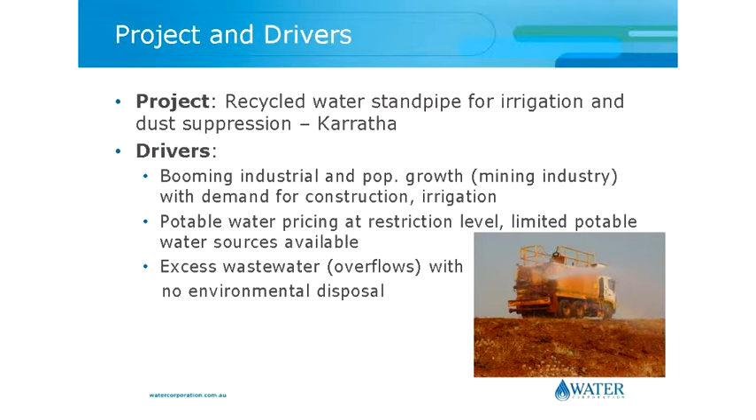I've chosen a slightly different scheme again from the other presenters. We've got lots of schemes as well. Most of ours are permanent schemes. I've chosen a transient scheme. I'm not sure if that's going to come up in the questions, but thought it might be quite interesting for the audience. The project is to develop a recycled water standpipe for irrigation and dust suppression in Karratha.

Now, for people who don't know where Karratha is, it's in the booming northwest of WA. Karratha is a city which actually probably sits at about 20 to 25,000 people maximum. Its population is estimated to grow to 50,000, so it's going to double. And basically, there's not enough potable water to cover people at the moment, so there are restrictions already.

And there's too much wastewater and not enough hydraulics to get that wastewater out to recycling. And so all of the potable water is at restricted level, and basically there's limited sources available. So even if you get a customer to come up and say, we want to use potable water for dust suppression, you may only get it for a year, maybe not much more than that. Which, as you can imagine, is a significant problem for us because we're meant to support development, and there's a lot of housing subdivisions going in this area to support the mining boom.

And so because we don't have the hydraulics to move the water through our existing recycling scheme, we have lots of overflows to the environment out of our plants. These overflows basically flow immediately around the plant. These are areas which aren't accessed by people, so it's basically the bush, but our regulator still doesn't really like it that much. And also it's important to note that Karratha is in the northwest of WA, as it gets a lot of cyclonic rain as well, so we get overflows just from rainfall too.

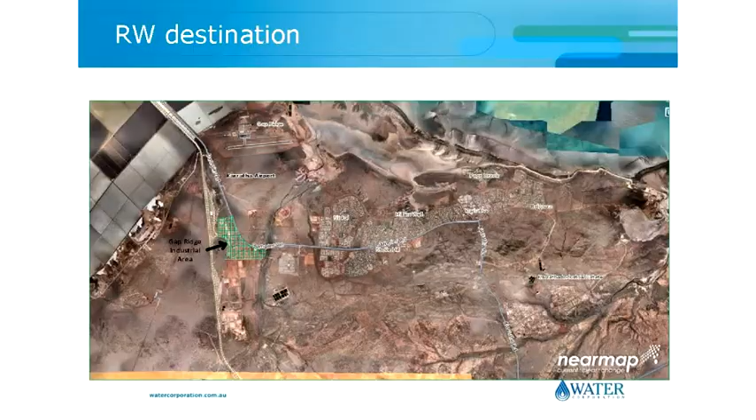So this is Karratha. I apologise for the scale of the picture. Basically, we've got two treatment plants. I should always say, can you spot them? There's one over there where you can see basically about 9 ponds, and there's one over here as well where you can see several clusters of ponds too. That one's K2 and this one's K1. We're very clever at our naming. And the plant I'm talking about is K2, which is the plant over there. And the green hashed area is the Gap Ridge Industrial Estate. So we're talking about housing estates and we're talking about industrial estates as well for Karratha.

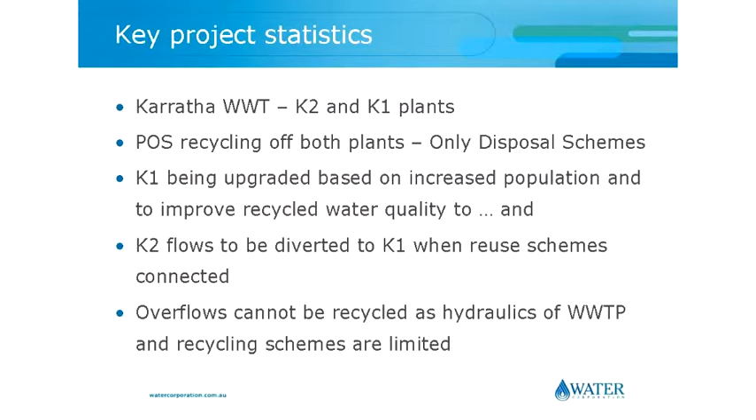Okay, so as I mentioned, we've got 2 treatment plants in Karratha, and at the moment they've got a scheme running off each of them. It's for public open space, and basically it's the only disposal. So we have no environmental disposal approved for Karratha. So every night of the year, the wastewater is pumped out onto ovals and parks throughout the town, even when it's raining. So you can imagine sometimes in cyclonic weather, we've got some very, very wet ovals.

K1 is currently in the process of being upgraded. It's being upgraded to increase its capacity to cope with more wastewater flows, but it's also being upgraded to increase its treatment processes to allow more uses of recycled water in the future, particularly a much higher quality water. The intention was to look at third pipe and other opportunities for housing subdivisions in the future.

Unfortunately, whilst it's getting upgraded, the city's still booming, so people still want to use the effluent right now. And the water coming out of K1 and K2 is pretty average. They're pond plants, completely overloaded. Basically, we're lucky to get 1,000 E. coli coming out of them that we're irrigating onto ovals, which I need to say is outside of the requirements of our DOH approval guidelines.

So when we upgrade K1, we're going to divert all the flows from K2 via a pipeline to K1. The only problem is there's a reuse scheme connected to K2 at the moment, so we have to connect the reuse schemes to be able to connect the treatment plants.

Overflows can't be recycled because of the hydraulics. We also have at our schemes contingency irrigation, so because we've got so much wastewater, we just set up sprinklers at the back of the plant and irrigate to evaporate basically. I know it's probably not normal to hear these kinds of stories, but this is what happens in the northwest of WA - it's purely disposal.

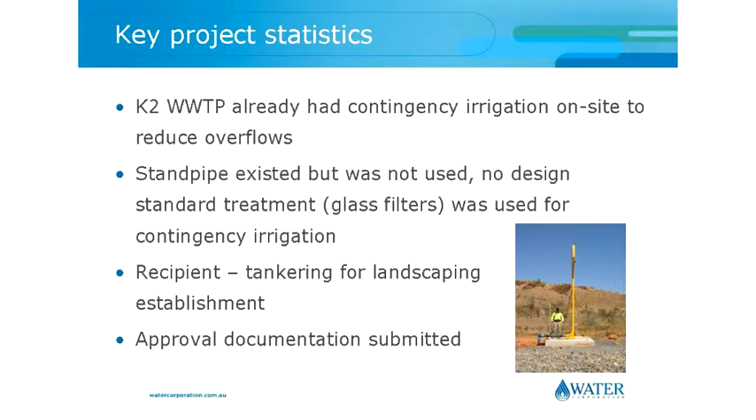And it's such a shame because there's so many users who'd like to use that water. So we said, how about we use the existing standpipe at K2, get it to a quality the department feels happy with, and use that for dust suppression. Landcorp and a lot of other major organisations were very interested to hear that, particularly because they wanted to stop paying restricted prices for dust suppression.

So the standpipe was in place, but it was never used. Basically, there was no internal design for how you treat recycled water for dust suppression, so we had to try a couple of different things, and someone came up with a clever idea for glass filters.

It's probably important to note, looking at that picture, there's not much out there. We've got one operator who runs about 5 of our treatment plants across the Pilbara, so we're not talking about high-tech equipment, high-tech people, or even high-tech assets.

So we decided to use the treatment plant for the contingency irrigation - the glass filters and the disinfection unit - and run that through the standpipe.

One of the recipients came and said, yep, we'll take recycled water. Basically they wanted to use it at the Gap Ridge industrial estate for irrigation purposes, setting up landscaping that, once established, would be self-sufficient - cyclonic weather would water it. So we had to submit an approval document to DOH for that.

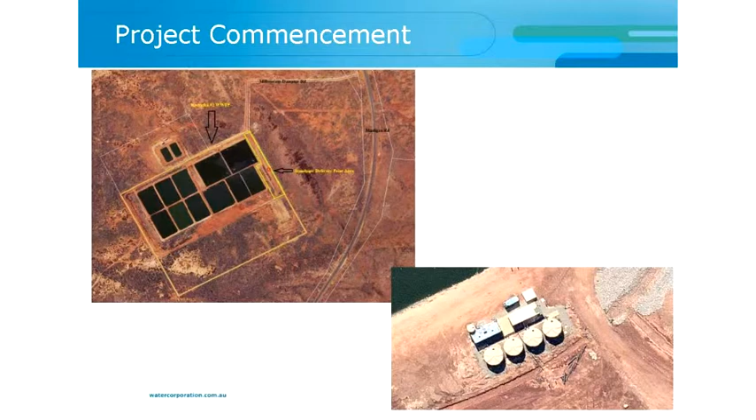And there were some treatment upgrades happening as part of the contingency irrigation, and we had to provide advice on what disinfection was required as well.

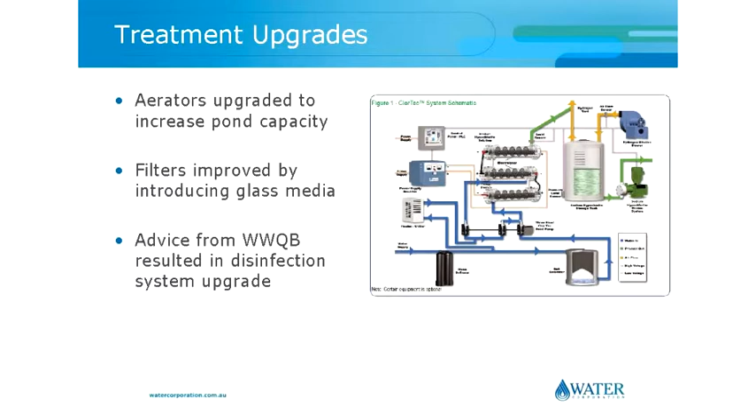So that's what it looks like. We set it up with a nice little touchpad - unfortunately, for the standpipe, people go and use it unless you secure it, so we had to set that up. And set up validation monitoring.

Now all of this is really important because, as I mentioned, our current effluent doesn't achieve the requirements for irrigation purposes of POS less than 1,000 every time it's meant to be sampled. For dust suppression, in the DoH guidelines of WA, it's meant to be less than 10.

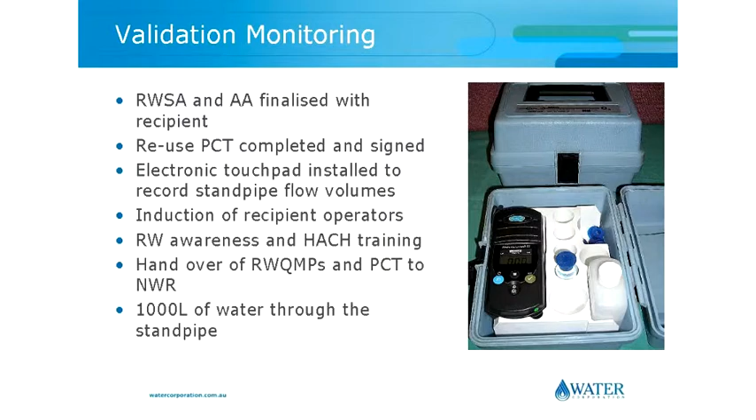So number one, we had to be confident that we were going to be giving a consistent and continuous flow of water that the DOH would be happy with. So we set up a lot of kit, which we thought would make the DOH more confident in how we ran the scheme to begin with.

We trained the recipients, taught them how to use the instruments, and wrote all of the approval documentation for the Department of Health. We also wrote a process control table - this is an operational plan. It basically tells you what to do and how to run the scheme, and if something goes wrong, what to do.

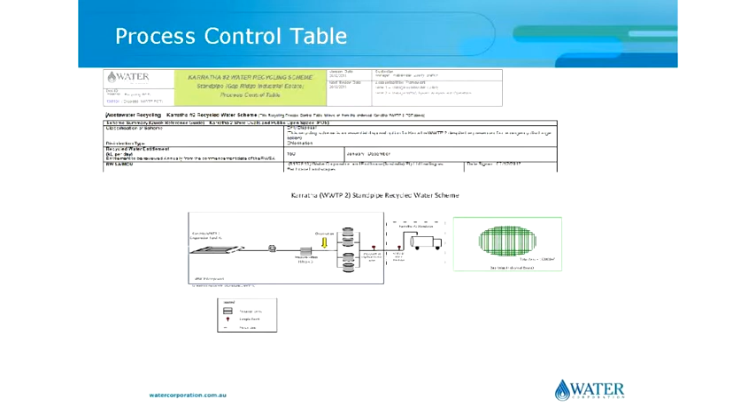So the project challenges, as I mentioned, we don't get great water out of these current treatment plants, so we had to basically work with the Department of Health to convince them that irrigating from a tanker for plants in an industrial estate out in the middle of nowhere is basically the same as POS, which could only achieve the less than 1,000 E. coli. That took some work, but the Department of Health agreed with us on that.

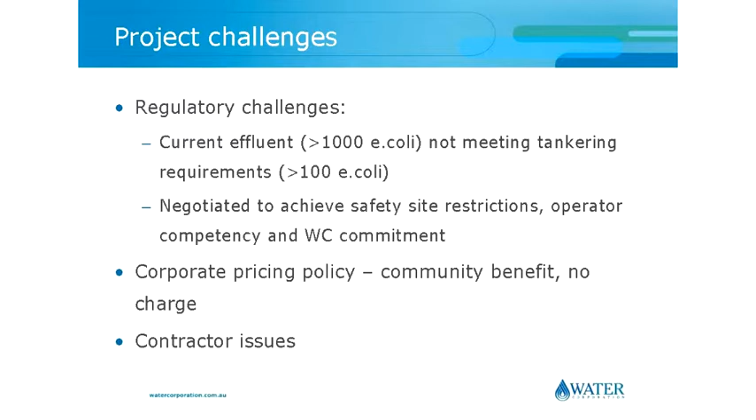They weren't so keen to focus on dust suppression at that because they still believe people are going to be on site, but we'll take that as our next challenge afterwards.

Our corporate pricing people, and I don't know if pricing's spoken about at these kind of workshops, but it is quite critical, because they believe that because the recycled water was being used for irrigation purposes, it was community benefit, and so the tankering customer received no supply charge whatsoever for that recycled water. Which is a great thing to get customers in, but from our region's perspective, it's no income stream. So they weren't that keen on it.

And you have to think about these things when you're putting schemes onto regions. You have to think about what's in it for them. Contractor issues as well, that we have to make sure that the contractors are aware of what they're dealing with and that they're going to achieve that compliance, because we've got quite a bit riding on it.

So, lessons learned in setting up this scheme. Well, it's important to say the scheme is now operational. But you need a dedicated project manager, so you have to keep pushing these projects through. A project manager has that role of pushing, because every time an obstacle comes up, oh, it's too hard, everyone wants to stop. So I probably highlight that as a critical one.

You need a patient customer. Things take time, so tankering customers want the water straight away. Luckily we had a customer for irrigation purposes who was a bit of a greenie, who thought this was a really good thing to do and basically told his client that this was worth waiting for, and that they were happy to pay for potable water in the short term.

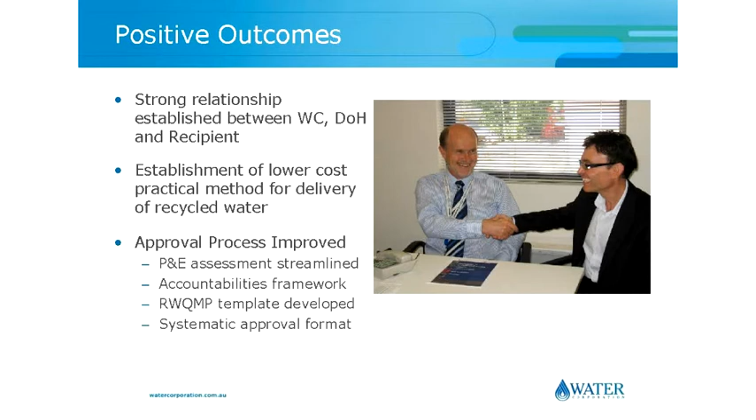And I just want to acknowledge the people who actually did this work. I may have been involved in the negotiations and the funding, but these are the people who did it. So Clary Hall as project manager, Aaron Lathorne, people from the region, Nathan Conley and Andrew Dukas, and the customer, particularly Francis Burke from Earthcare.